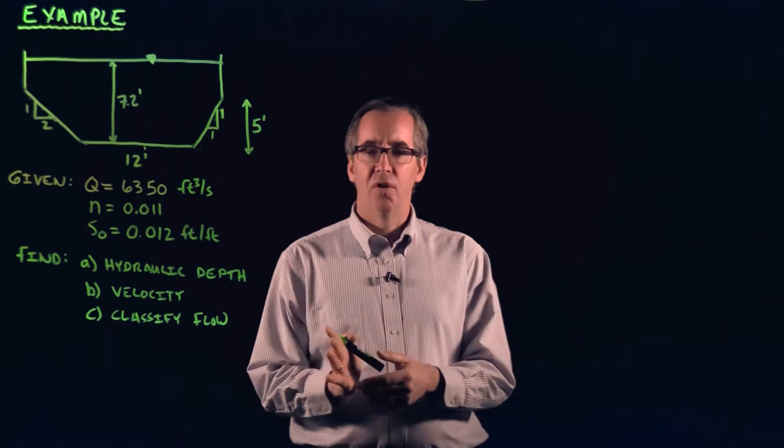The first one will be to determine the hydraulic depth. There will also determine what the velocity of the flow is. And then lastly, we'll classify the flow by calculating the Froude number.

So let's go ahead and look at the hydraulic depth. The hydraulic depth is equal to the area over the top width. Let's go ahead and do these calculations. I'm going to start with the top width.

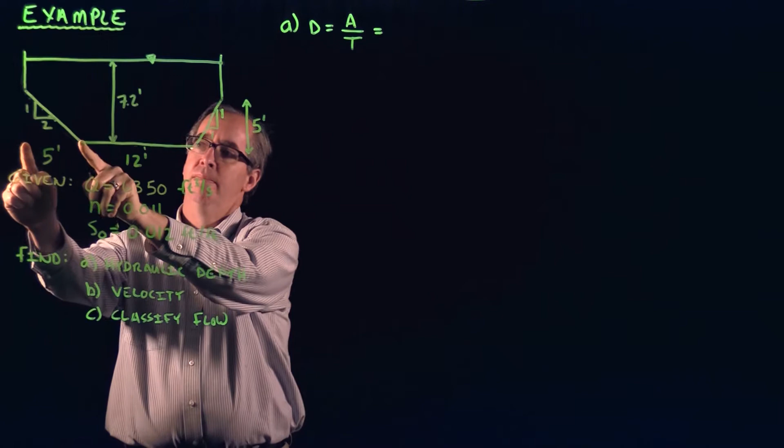Now, if I know that this depth here is 5 and the slope is at a 2 to 1, then this piece right here is going to be 5 feet from this corner to the edge. Likewise, if this depth is 5 feet and it's a 1 to 1 slope, then this dimension here is actually... oh, looking at my numbers, I see that's not 5 feet. That would be 10 feet.

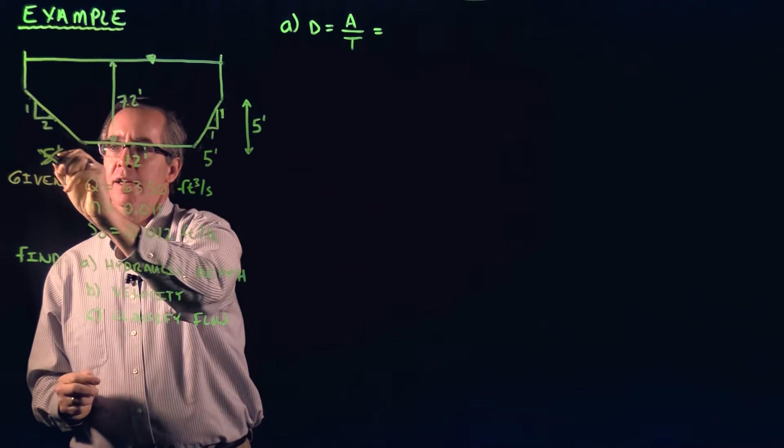So, the total width of this flow is going to be the 10 feet plus the 12 feet plus the 5 feet. Let me go and carry that over. That's 27 feet.

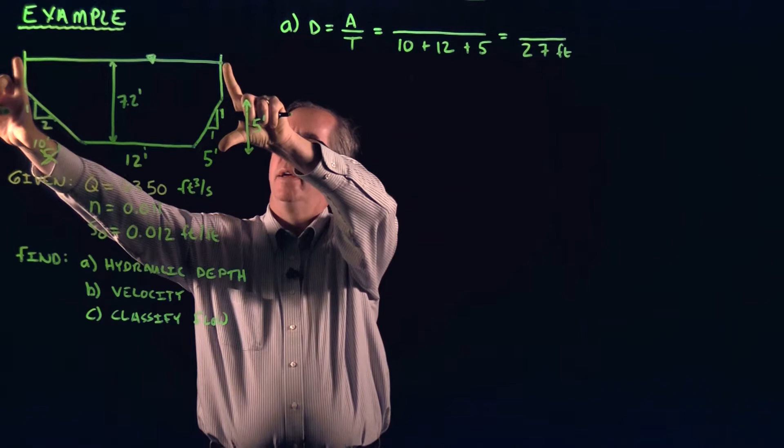Now the area, the way I'm going to do it, there's lots of different ways, but I'm going to take the entire rectangle here, which has a width of 27 and a height of 7.2, and I'm going to subtract out these 2 triangles. Now the area of this triangle, I have a triangle that would be 5 high by 10 wide, so that area is 1/2 times 5 times 10, or 25. This one here is a triangle that's 5 by 5, which is 25, and again we're taking half of that, which would be 12.5.

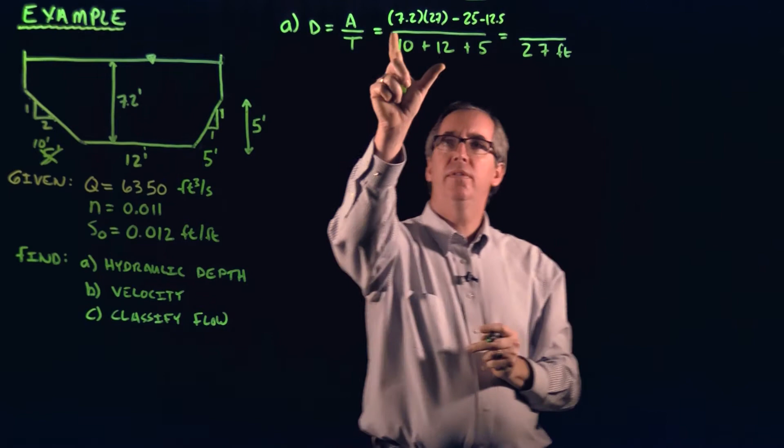So if I take 7.2 times 27, subtract 25, and subtract 12.5, I get an area of 156.9 feet squared. Based on that, I get a hydraulic depth of 5.81 feet. I'll go ahead and box that here. The hydraulic depth, 5.81 feet.

So that's part A. Let's do part B now.

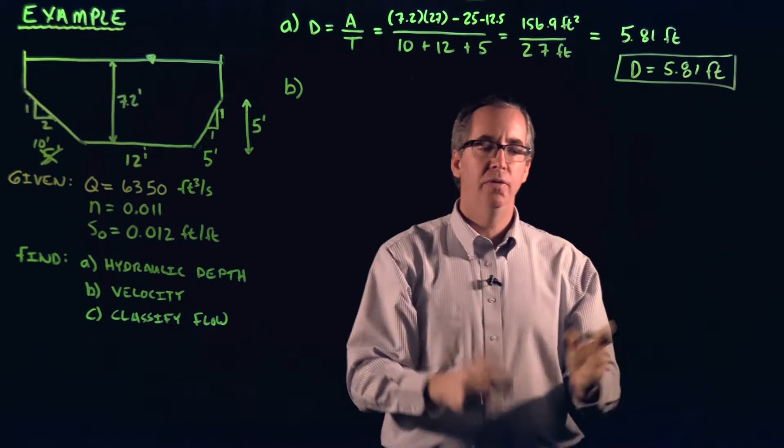Now in part B, a lot of you guys are going to think, all right, we know the flow, we calculated the area, couldn't we just use the continuity equation? Couldn't we just say Q equals VA and solve for V? But in this particular case, there's a lot more to it than that.

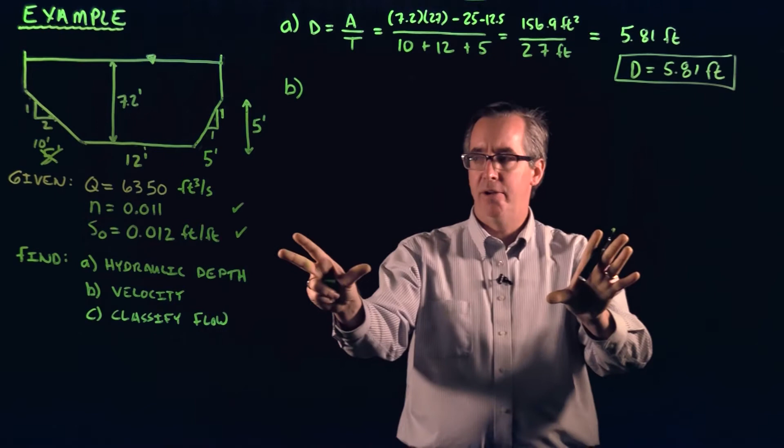First of all, we know the slope of the channel, meaning going upstream to downstream, that's given. And we also know the roughness of the channel, which is basically the friction factor. Having these 2 parameters here tells us that, in an open channel flow application, if we know Manning's N and we know the slope, we definitely should be using the Manning's equation to calculate the velocity.

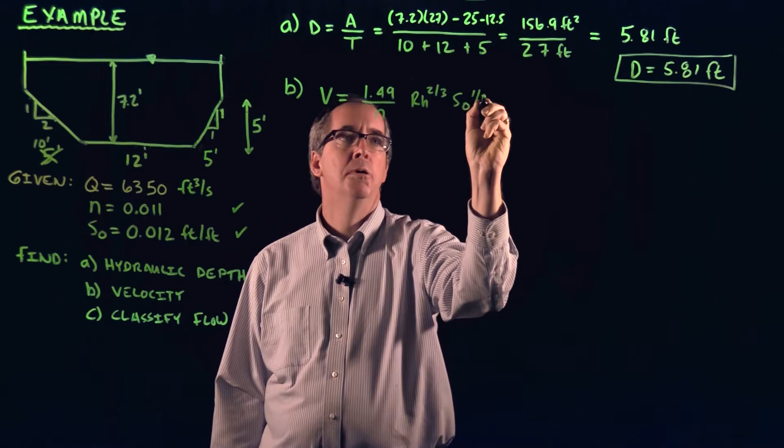The general form of the Manning's equation is V equals 1.49 over N, for the English version, times the hydraulic radius to the 2/3 power, times the square root of our slope. So when I look at this equation, I'll be solving for the velocity. I know N, it's given to me, and I know the slope. The one thing I don't know is this hydraulic radius, so I'm going to have to do the hydraulic radius calculation to get that velocity.

The hydraulic radius is the area over the wetted perimeter. Now we calculated the area already up here, so we're going to need this wetted perimeter.

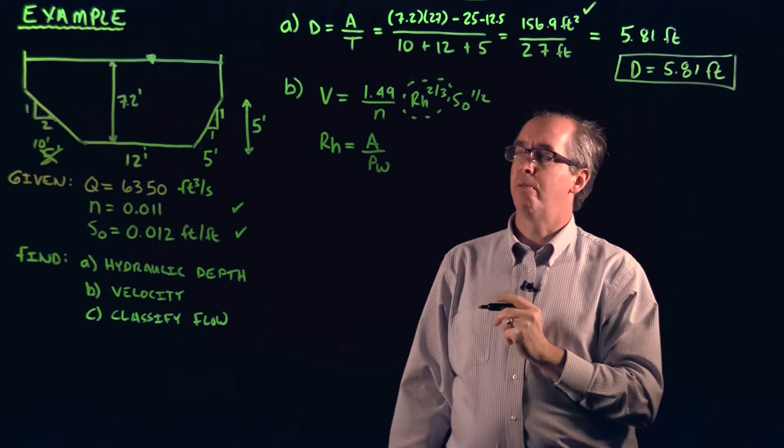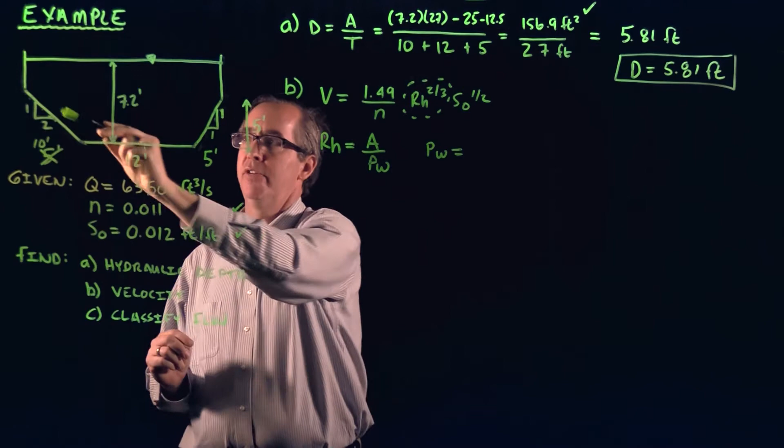I'll write the wetted perimeter right next to it here. What the wetted perimeter is, it's not the perimeter of the entire cross section, it's the perimeter where the water is in contact with the channel surface, like if it's earth, or if it's a pipe and it's partially full. It's where the water's just in contact with the pipe. It does not include the part that's open to the atmosphere.

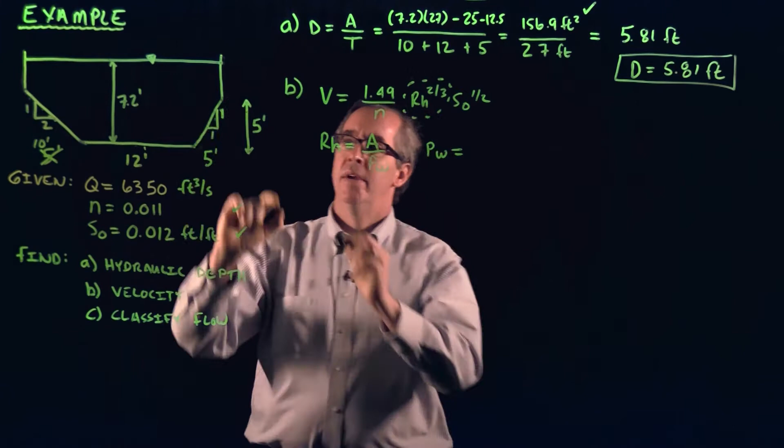Now, if this entire depth is 7.2 and this dimension here is 5, that means this piece right here is 2.2. So I'm going to start on the left and just start adding up all the pieces of this perimeter to figure out what that final wetted perimeter value is. So I start here with 2.2 feet.

Then I have to deal with this hypotenuse. Using the Pythagorean theorem, I know this depth here is 5, and I know this dimension here is 10. So this piece here would just be the square root of 5 squared plus 10 squared, which is the square root of 125. Then I'm going to add the 12.

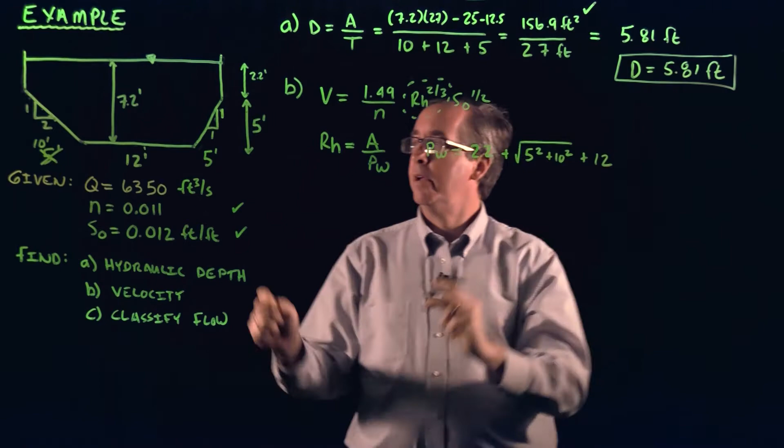Then I'm going to do the same thing again with the Pythagorean theorem. In this case, I have this dimension 5 squared plus this dimension 5 squared. And then the last piece I have is the 2.2. When I add this up, I get that the wetted perimeter comes out to be 34.65 feet. So I'll go ahead and underline that.

So I have everything I need now to calculate the hydraulic radius. I've got the area, which was calculated earlier, of 156.9 feet squared. And I know the wetted perimeter is 34.65 feet. So this gives me a hydraulic radius. The value comes out to be 4.528. I'll carry it out a little further than I normally do, but just 3 decimal places.

Now I can finally solve for the velocity. So I've got 1.49. I know Manning's n is 0.011. I've got the hydraulic radius here that we just calculated at 4.528, and I'm going to take that to the 2/3 power, and then I have the slope here as 0.012, and we'll take that to the half power. When I do that, I get a final velocity equal to 40.6 feet per second.

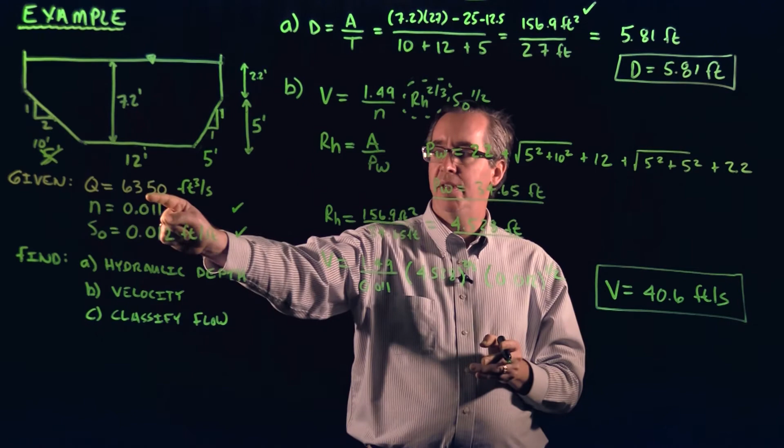So again, it's a little different. You can go back and see how it varies with Q equal VA. If you took Q of 6350 and divided by the area here, you can take a look and see how different it is.

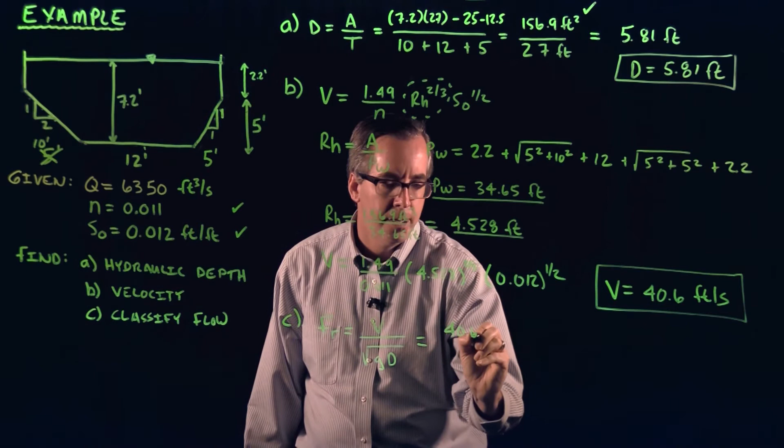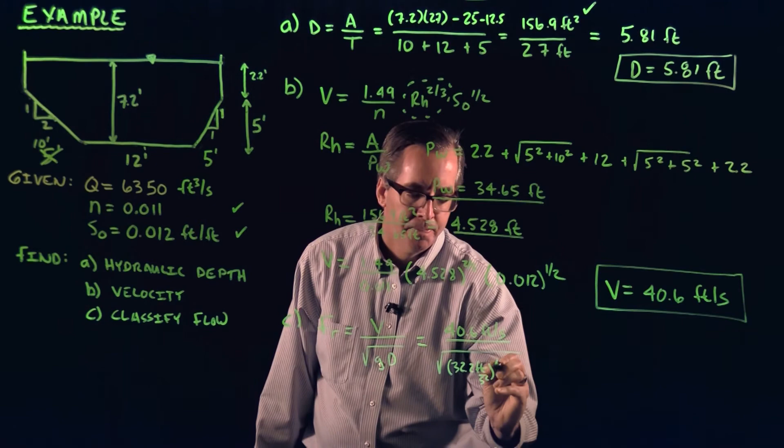But again, because we know the roughness of that channel and we know the slope, we definitely should be using the Manning's equation. The last piece is to classify the flow. We do that by calculating the Froude number, which is the velocity divided by the square root of g times the hydraulic depth. We have all the terms we need to do this. We have the velocity right here of 40.6 feet per second. For g, we know that in English units it's 32.2 feet per second squared. And then we know the hydraulic depth that we calculated in part A is 5.81.

Notice how all these units cancel out, right? We'd have feet squared per second squared, and the square root is feet per second in the denominator, and we have feet per second in the numerator. So the Froude number comes out, as it should, as a dimensionless term, and it comes out to be 2.97.

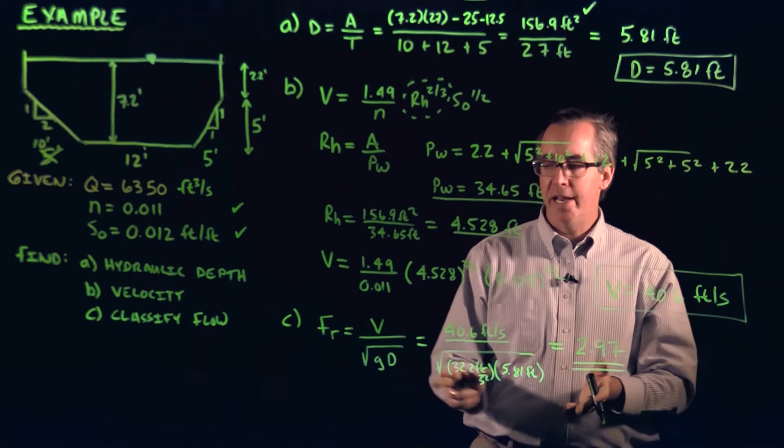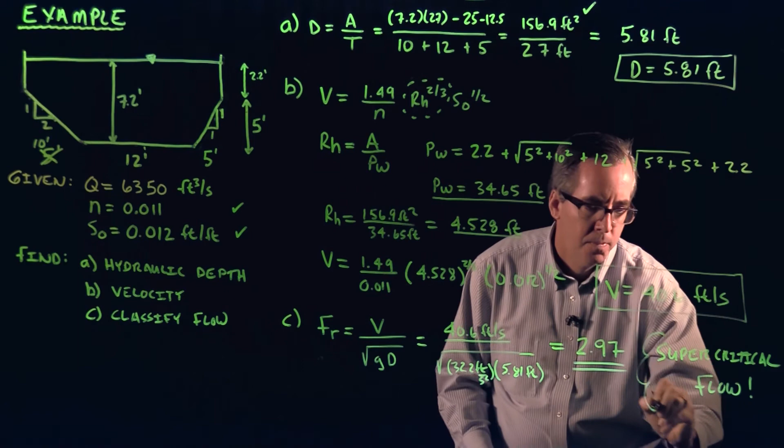Now, if you recall from the lesson, any Froude number over 1 is classified as supercritical flow. So this will be a supercritical flow, if I can write it out here. I'll circle it so we can highlight what that is.

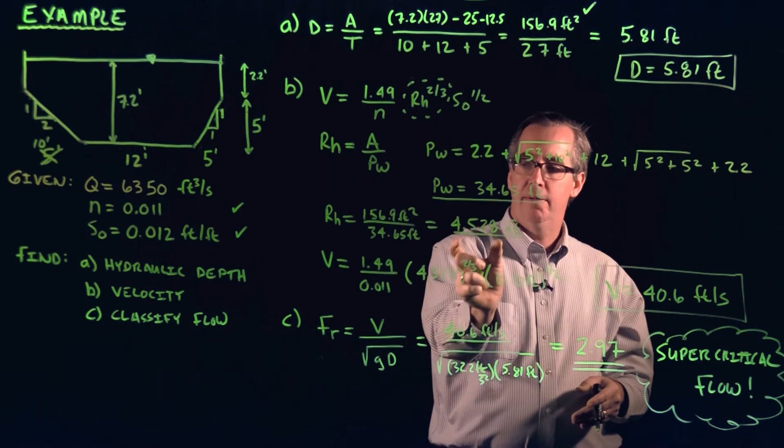So again, taking you through the procedure, using the dimensions of the channel cross-section, we were able to determine the hydraulic depth. We also were able to determine the hydraulic radius, which led us to the velocity, right here of 40.6, instead of using Q equal VA. And then we went through and classified the flow based on the Froude number using the velocity and the hydraulic depth terms. It came out to a Froude of almost 3, which is clearly a supercritical flow. And that concludes this example.